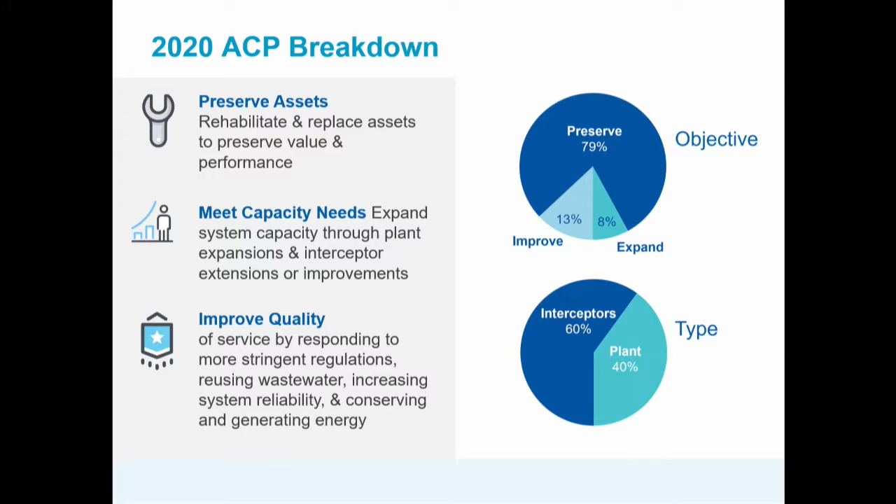So that's our solids processing facility at the Metro plant, Hastings, the plant at Hastings, Rogers, Northeast area system improvements in our Interceptor system, Northwest area system improvements, as well as renewal of 1MS100, which is the large interceptor system between Minneapolis and St. Paul that's oftentimes referred to as the Joint Interceptor. And so our completed projects that were moved out of the 6-year ACP is a deduct of $99 million. So this equates to a total 2020 authorized capital program request of about $980 million.

So in summary, the final proposed 2020 through 2025 capital program totals about $1.4 billion, of which $980 million is in the authorized capital program and $408 million is in the capital improvement program. The proposed 2020 capital budget is $158 million, all of which will be incorporated into the council's unified capital budget that you'll consider later on as part of a full council.

We have a project at the Metro plant to build a new services building and modify the existing analytical laboratory building. The project allows us to discontinue use of Metro 94 rental space and to discontinue use of on-site temporary trailers. Some of those locations are shown here.

Staff and the R&D trailers will be relocated to the analytical laboratory building. Construction field office and Metro 94 staff will be relocated to the new services building. Assembling work groups by function improves efficiency and effectiveness. The project will also include conference space in the services building to accommodate industrial and community customers.

We plan to initiate construction of this project in 2020 using design, build, delivery. This year will be before the council to approve an engineering contract for owner's agent services, and those services will assist staff with preliminary design and construction.

The Metro plant is the largest wastewater treatment plant in our system. The current capital improvement program for the Metro plant alone is a little over 30% of the total program for plants and interceptors. We have 9 plants. The Metro plant treats 70% of the total wastewater system flow, and 75% of the wastewater solids.

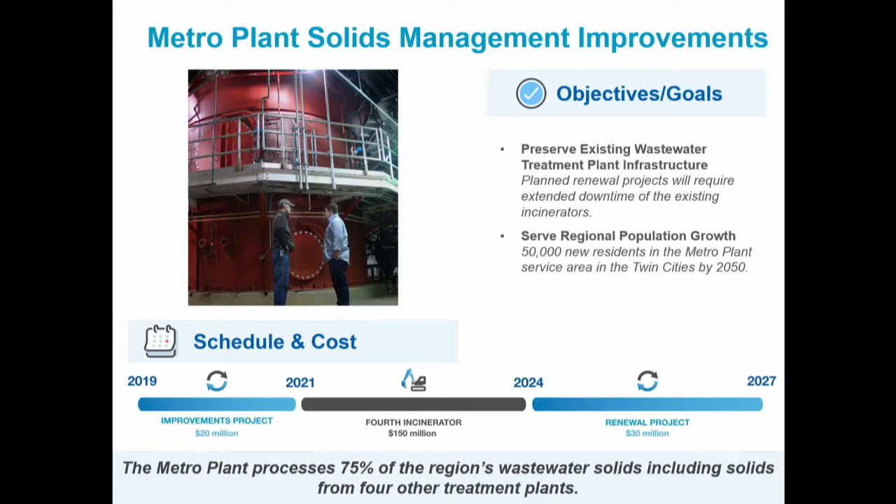We acquired the Rogers wastewater treatment facility in July. We plan to use existing capacity until a new Crow River wastewater treatment plant is constructed. When the Crow River wastewater treatment plant is brought online in 2030, it will free up interceptor capacity to serve growth in the northwest Hennepin County and the urban core.

We will have a small construction project as shown here next year to modify the Rogers facility. The improvements project will provide separate restroom facilities, office space, permanent backup power generator, security, and other miscellaneous modifications needed for operation by MCES. We will advertise a construction project for the construction contract for this project later this year or early next year. After the Crow River wastewater treatment plant is brought online, we will decommission the Rogers facility.

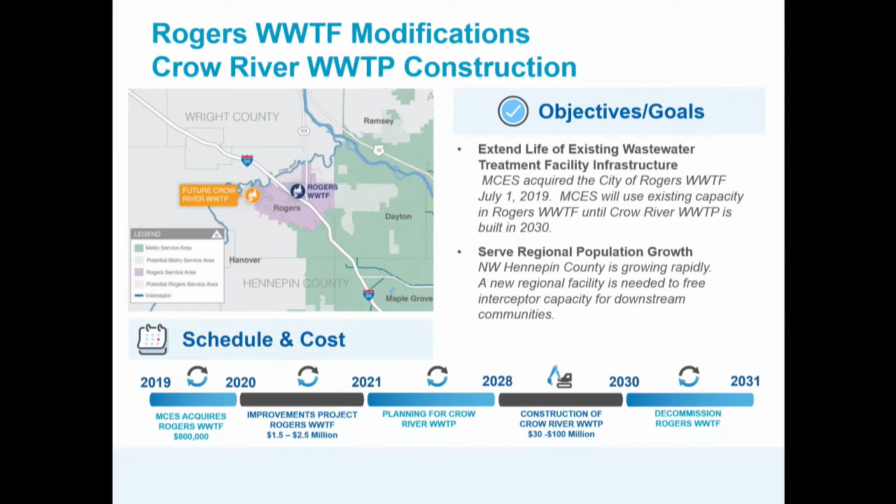This is a solids improvements project at the Empire wastewater treatment plant. This plant is located in Empire Township near Farmington. Empire has digesters that treat wastewater solids to a biosolids product suitable for land application.

Biosolids are stored on 2 asphalt pads shown here in the back of this photo. The biosolids are applied to a farm field either in the spring before sowing or in the fall after harvest. There are 2 phases currently under design.

We will open bids for phase 1 on October 3rd. Phase 1 will increase pad storage capacity by adding a cover to one of the biosolids pads and by improving pad drainage. The estimated construction cost for phase 1 is $9 million, and the bid results will be presented to the council prior to award of the construction contract later this year.

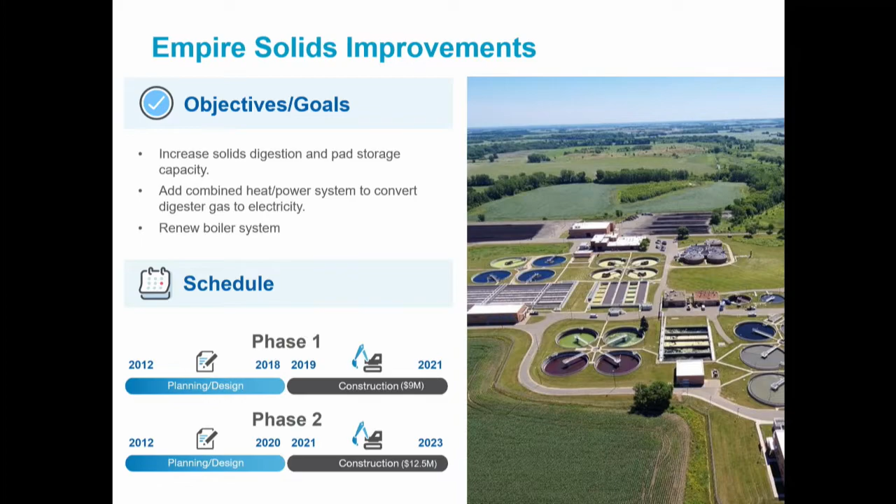Phase 2 includes digester modification and the addition of a new combined heat power engine that converts digester gas to electricity. Construction of phase 2 will begin after completion of phase 1 in 2021.

This year, we will complete some planning activities that will help us determine the schedule for building the new Hastings wastewater treatment plant. Replacement of the existing plant, located near downtown Hastings, is included in the 2040 Water Resources Policy Plan. The existing plant was originally constructed in 1952 and has undergone 2 major expansions, in 1967 and 1981. We know the plant is in need of renewal, and we will complete a total plant condition and performance assessment to determine renewal and replacement options.

And then we'll make a recommendation based on a financial analysis. The new Hastings plant site has already been acquired. It was purchased in 2005 following an extensive site selection process. The new site is 221 acres and it's located along County Road 54, about 2 miles from the existing plant.

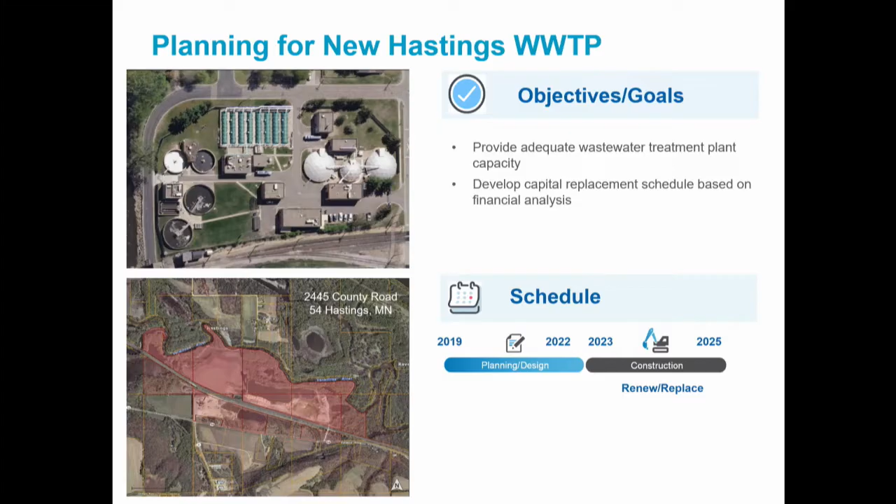Finally, another project I wanted to introduce is we are designing a wastewater reuse system for the Metro plant to take the place of some of the groundwater withdrawal. The Metro plant has 3 service water pumps. Just one is shown here, which withdraw water from the bedrock aquifer for various in-plant industrial uses. These include pump seal water, wash water, and equipment cooling water. We can reduce the groundwater withdrawal by shifting these uses to wastewater reuse.

The project will add treatment to make the wastewater suitable for limited human contact. We'll still have to withdraw some groundwater to protect plant infrastructure from uplift, but switching some of those industrial uses will help us reduce our withdrawal, we anticipate, by about half.

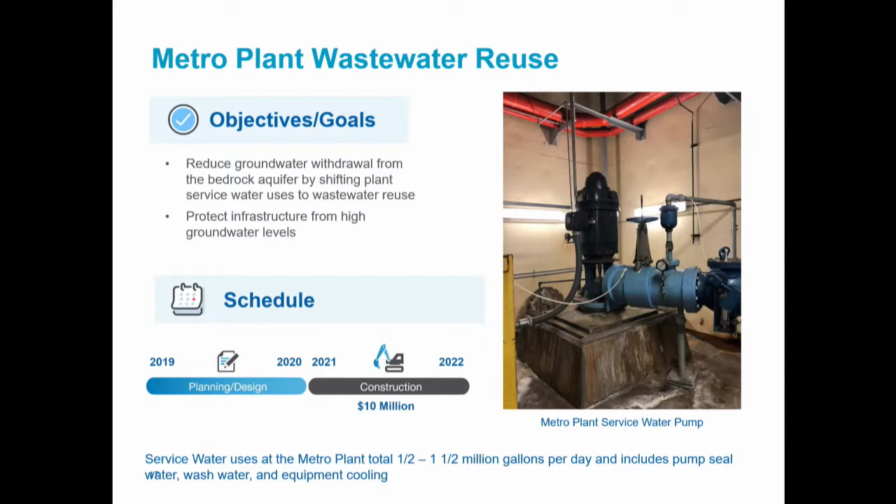Next, I'll turn it over to Adam, who will talk about the Interceptor projects.

Thank you, Renee. Members of Environmental Committee, Madam Chair, I'd like to introduce a short list of projects included in the Interceptor system that we've identified across the metropolitan area. Many of these projects reflect our continued emphasis toward asset renewal.

To list a few areas, we have identified in our 6-year capital program $124 million of projects in the Minneapolis system, $74 million in the St. Paul system, $22 million for the St. Bonifacius lift station and Forcemain rehabilitation project. Our L32 project is $25 million, and overall lift station rehabilitation improvements are $18 million. So there's a total of $518 million within our 6-year capital program.

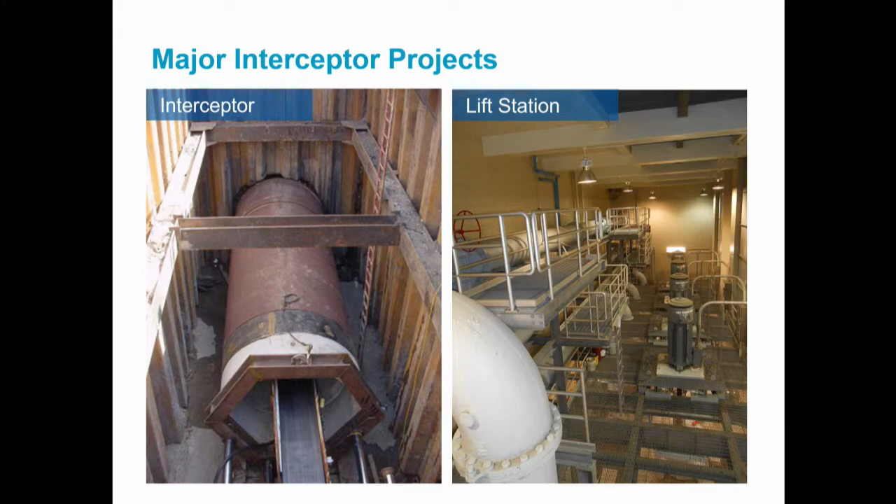A new project family has been identified in the capital improvement plan concerning the Northwest area interceptor improvements. Planning is needed to define capacity constraints and condition issues throughout this area, and determine the ultimate service area. An example is the Elm Creek Interceptor and Crow River treatment sheds. We need to screen alternatives for potential river crossings and lift station locations, and prioritize future projects and develop an implementation schedule and costs.

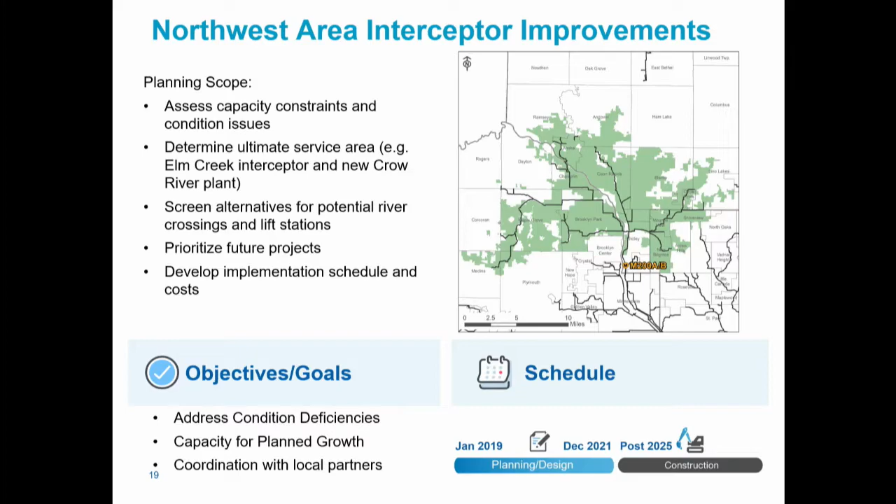Within this area, I've previously presented a business item related to the L32 lift station, which we need to reconstruct. The existing lift station is nearly 50 years old and has reached its useful life. The existing station lacks adequate storage for allowing response time during outages, and there's not enough room on the existing site to maintain existing service and construct a new lift station.

So a property was purchased by MCES several years ago on the east side of the river. The land is currently rented out to a Girl Scout camp, Camp Lockeslea, and there's been a lot of coordination between stakeholders, including the city of Fridley, Friends of the Mississippi, and the surrounding community. The ACP request for the full $25 million covers the planning, design, and construction costs for the project. Planning commenced in 2019, with a design start in 2021 and construction to follow during 2022 through 2025.

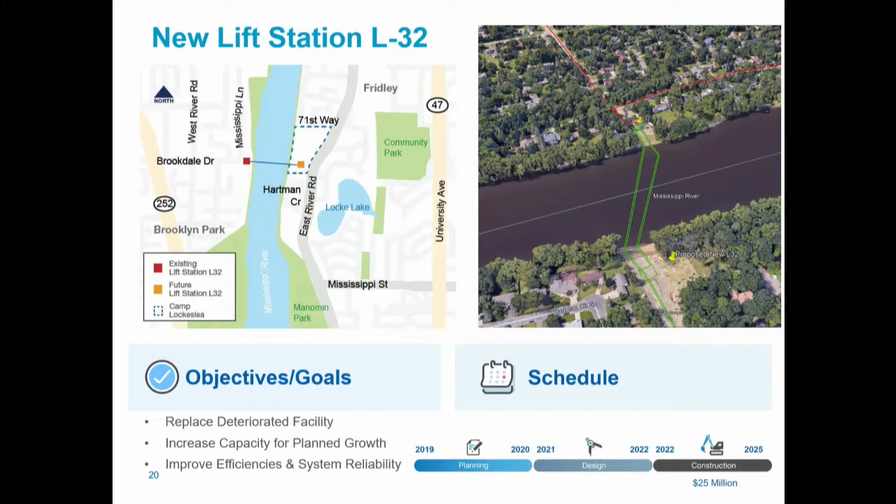We defined in the 2019 ACP a project called the Interceptor 1MN340 Rehabilitation Program, under project number 8092. The 2020 ACP proposes a new name, the Minneapolis Interceptor Improvements Phase 2, which will include planning and facility plan preparation and prioritization for several projects within the city of Minneapolis, including 1MN340.

But we have a number of needs, including several pipe-in-pipe locations. These pictures show that during the 1980s, when we had sewer separation projects in the metropolitan area, there was difficulty in placing new sanitary pipe, so the solution at that time was to place a corrugated metal pipe in the bottom of the existing storm sewers. This worked well for a while, however the CMP has corroded. We're currently fixing a lot of those pipe locations where the pipe has fallen apart through maintenance contracts, but overall there needs to be a more permanent solution.

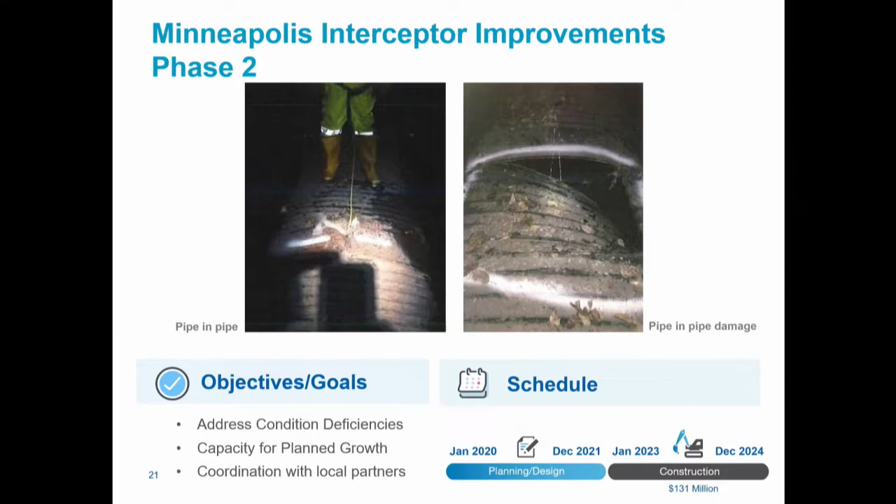The Hopkins system, East Isles Forcemain replacement, is the very last phase of a project which started well over 10 years ago with the facility planning. The 5 miles of Forcemain between the city of Hopkins and the city of Minneapolis.

The remainder is 1,900 feet of 30-inch Forcemain, and we plan on replacing that with twin 18-inch Forcemains. The area of replacement is right in East Isles, on the east side of the map, shown by the orange line work and keynote.

The area also includes a drop, which is very badly corroded, where the flow drops into an existing interceptor, 1MN330. So there's approximately $5.3 million worth of work, and we've been in preliminary design phase on that project, and we'll continue through 2019 with construction starting in 2021.

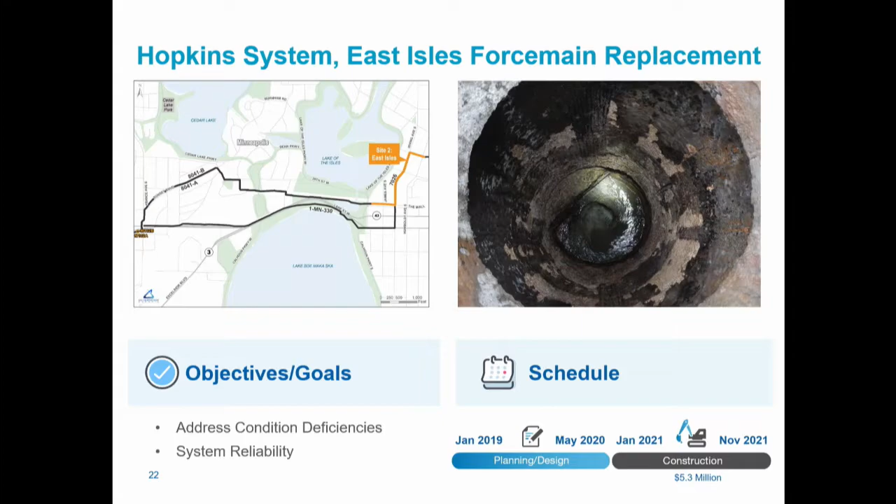The Interceptors 1SP200 and 1SP201, Battle Creek Rehabilitation. This interceptor services Woodbury, parts of Lake Elmo, and Cottage Grove. The interceptors pass through Battle Creek Park, and the project includes about 5,000 feet of lining of 30 and 33-inch concrete pipe that was constructed in 1959.

This also includes improvements to the Battle Creek Siphon Head House, located right in Battle Creek Park, with a mechanical grinder and structural improvements. As you can see in the pictures, this is one of the better sets of pictures I've seen of badly corroded pipe. We have condition 5 pipe, so this project is needed to prevent a future problem.

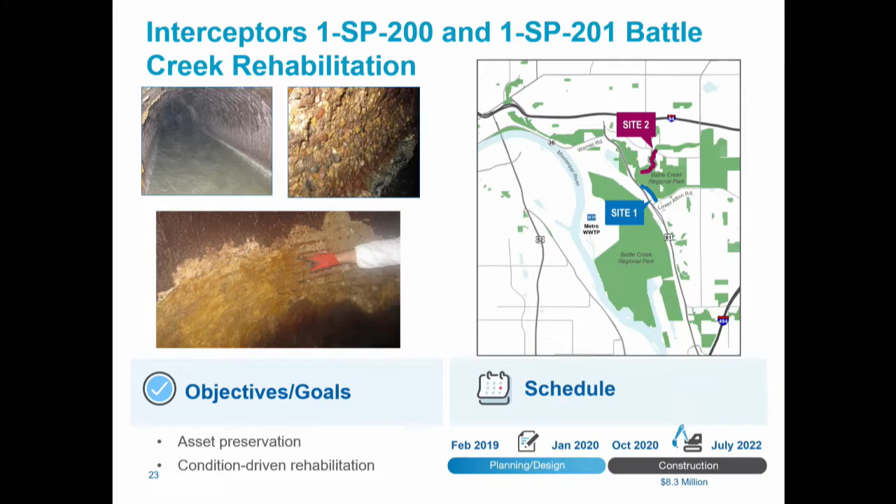The L24 lift station and Forcemain replacement project. I was in previously for a business item for land acquisition needs for this project, the same as part of the St. Bonifacius system. This project includes approximately 3 miles of new Forcemain and rehabilitation of the existing L24 lift station due to the age of the system and also capacity constraints due to growth.

We're looking at construction to begin in 2020, and it's approximately $25 million worth of work. Just to note, this project had a portion of the Forcemain previously replaced under a different project underneath Lotus Drive.

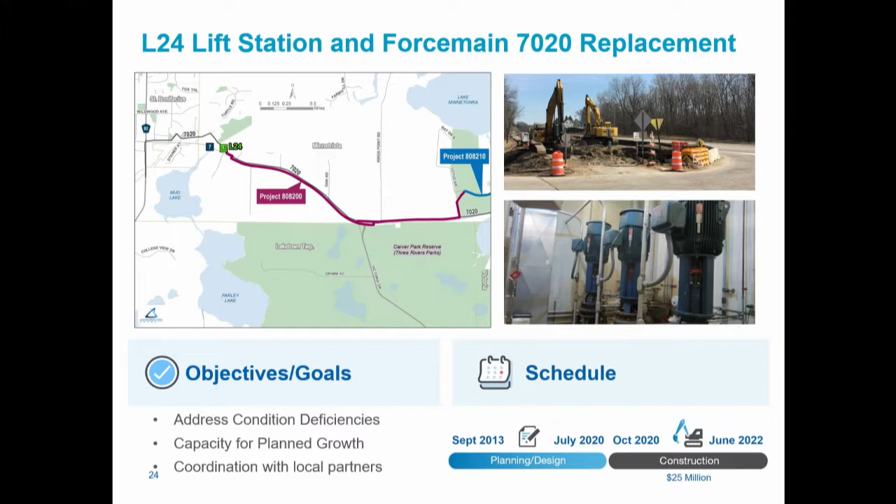Madam Chair, members of the council, before you is the schedule. On August 8th, the divisions had a division level budget presentation. On August 22nd, there was an adoption of the preliminary unified operating budget and levies. And tonight, we're presenting the MCES capital program and budget.

On October 9th, there will be a division level capital program presentation, followed by an adoption of public comments on the draft budgets on October 24th, with anticipation that on December 11th, the entire council would adopt the final 2020 budget and levies. So this is just a piece of the process.

This presentation is more in depth on environmental service issues than what you'll see as you move through the process. That is why we wanted to provide you with some examples of some of the programs and projects we're planning to undertake. So there is no action before the council this evening other than to respond to questions.

Thank you. Are there questions? Anybody have a question? We have to ask a question?

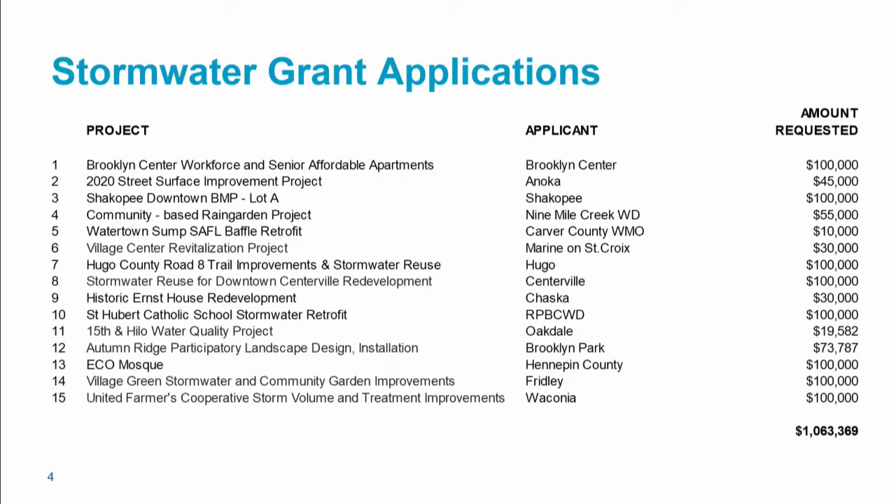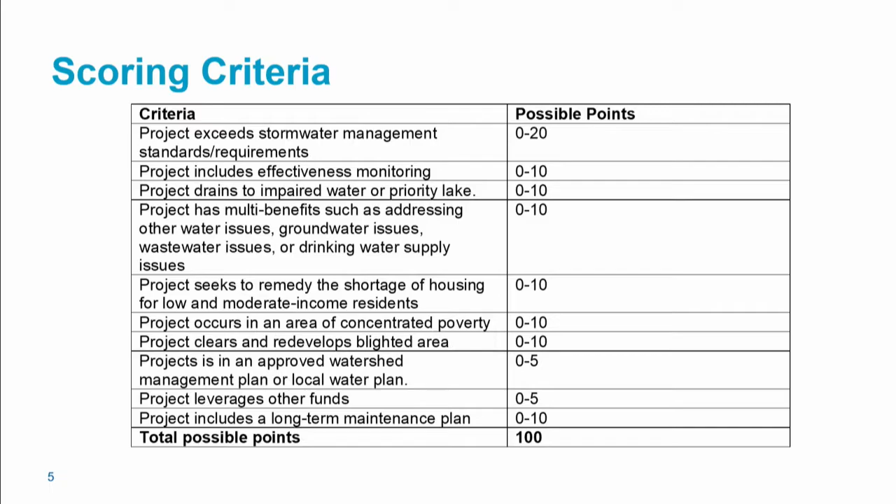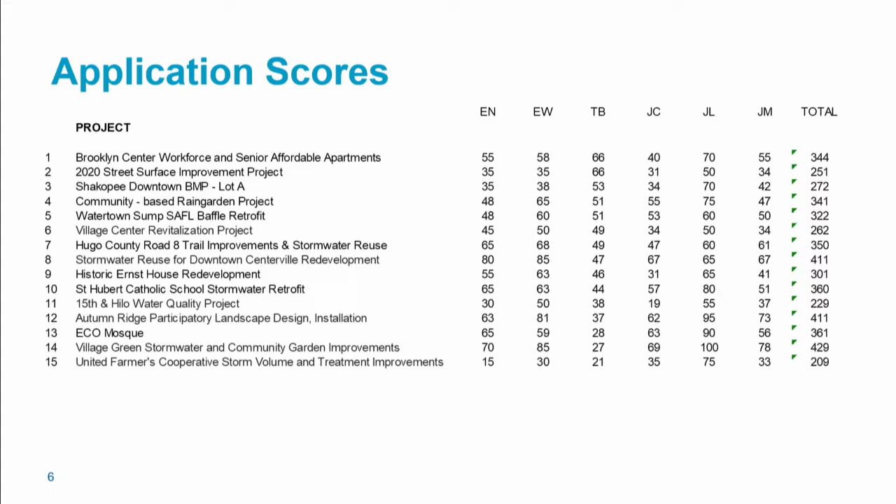Here are the final scores for each of the applications in the order they were received. The next slide shows the applications sorted by total points, highest to lowest. All of these projects were good projects. Some just scored higher than others based on the criteria.

Again, we got a request for about twice as much money as we had available. So here are the recommendations we've settled on. The top 3 projects were pretty much unanimously scored as the highest ranking projects by all the reviewers. The next 2, the 4th and 5th project, there's really only 1 point difference between the scores for those projects. After that, it drops by about 10 points, and after that, it drops by another 6 points.

In order to spread the funds around a little more, we recommended partial funding for those applications below the top 3. We recommended more for the 4th and 5th because they were only 1 point apart—$75,000 for each. They each requested $100,000, the maximum amount. The 6th project, we recommended $50,000 for because it was 10 points lower than the next closest one. And the final 7th project, we recommended $25,000 for.

I have to stop you for a second — looking at your nice picture, except that when our wastewater treatment plants discharge into rivers, they don't send brown stuff. I have an aerial photo, Madam Vice Chair, of our wastewater treatment plant discharging into a river — it's lovely clear water discharging into murky brown water. That's a great observation, thank you. A map from Iowa.

I'm going to talk about the history and purpose of our stream monitoring program — a few historical highlights, and then walk through the program element by element to explain how they work together to describe stream water quality.

The purpose of our monitoring program is to support regulatory strategies by quantifying regional non-point source pollution, to measure regional stream health, to provide actionable information to our partners for local water management, and to partner with local public sector water resource practitioners to monitor and assess regionally significant streams.

In 1989, Governor Rudy Perpich set a goal of a 40% phosphorus pollution reduction in the Minnesota River Basin. In response, Environmental Services developed a network of non-point source pollution monitoring stations in the lower Minnesota River. The data from this program was eventually used to inform major wastewater treatment upgrades at the Metro Plant in the mid-90s.

Between 1996 and 1999, Environmental Services was directed to develop target pollutant loads for the streams in the Twin Cities. As part of that effort, the stream monitoring program was expanded to 21 monitoring stations throughout the metro area. The original monitoring program was entirely within the Minnesota River Basin, now our monitoring is region-wide, including stations developed with local partners. Now in 2019, we are celebrating 30 years of this monitoring program.

Here are some pictures of our hydrology monitoring. This larger picture is Credit River near Savage, Minnesota. All of our streams are wadable at some point during the year, not necessarily all the time. When doing a wading measurement, you can see the handheld device we use, just to answer how much water is flowing past us right now. This lower picture is the Vermilion River in Hastings, which tends to have higher flow and isn't safe for wading, so we use this super cool boat to answer the same question: how much water is flowing here?

At all of these locations, we also have automated equipment collecting information for us. We make these measurements on a periodic schedule—our automated equipment takes a measurement every 15 minutes, telling us how much water is flowing past the stream. This data is uploaded hourly to our EIMS website and is publicly available.

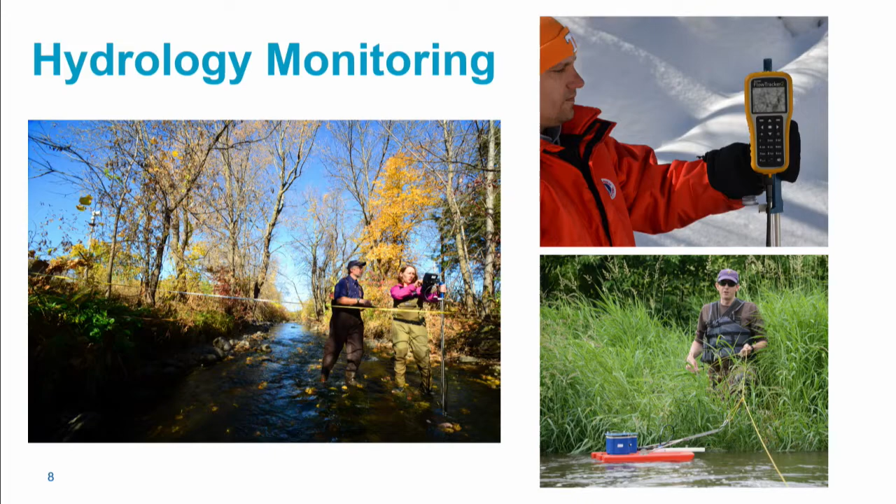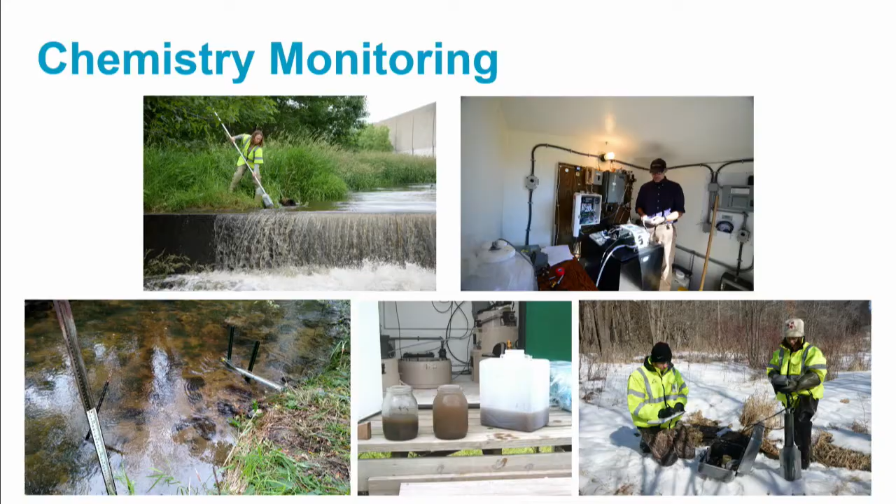Then the third element that I want to talk about is ecology monitoring. For all of our streams, we sample macroinvertebrates and we do a habitat assessment. The reason that we sample macroinvertebrates, which are the kind of bugs that live in the water, is that they are living there for either their whole life, or some of them, for example a dragonfly, are aquatic as a larva but then emerge as an adult terrestrial bug. No matter what, the length of time that these bugs are exposed to the stream conditions informs us a lot about the water quality over time.

For example, when we collect any one of those bottles of water that you saw in the pictures, that only tells us what the water was like at the moment that we collected that bottle. Bugs have a known ability to tolerate pollution, so when you collect an entire community of organisms and identify them, you can know if you have a community that's primarily clean water bugs, that's really good evidence this is a clean stream. Conversely, if you've got a community that's mostly known to be very tolerant of pollution, that's good evidence this is a pretty stressed out system.

Macroinvertebrate monitoring is really important because it gives us very concrete information on the health of the stream. It's also really important because it's very engaging. We had some live bugs at our Battle Creek tour in July, and I bring live bugs with me whenever I can. It wasn't super appropriate for the council chambers, but they tend to really draw people in, kids or adults, and it's a great way to introduce the topic of water quality or water resources. Even when people think they're creepy, they still want to get a good look.

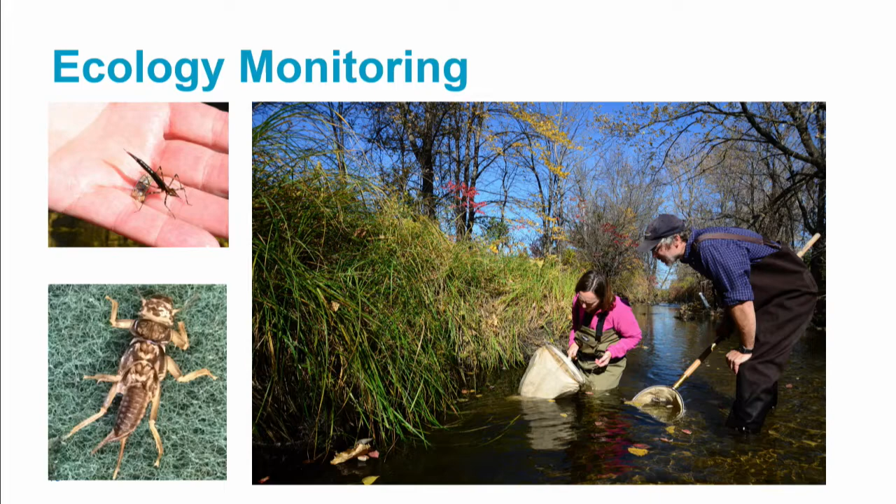And we said, okay, when the grown-ups are gone, bring your kids on over and we'll talk them through what we've got. So we had a whole classroom full of really fascinated preschoolers come and look at our macroinvertebrate samples. I think it's a way to make stream monitoring a lot more practical and engaging when you're trying to talk to a more general audience.

So I hope I've given you a good overview of our stream monitoring program. I'd be happy to take any questions that you have. I have a question before I'm going to offer it up to you guys.

So you said that the whole stream monitoring thing started in 1988 because Governor Carlson wanted to reduce phosphorus in the Minnesota River. What is the phosphorus now compared to what it was in 1988?

Okay. Questions? Councilmember Allstern?

It's hard to make a really specific statement like that with this general trend overview, but we do have a really nice fact sheet and chapter reports on our EIMS website. So if you are curious to know more specific details about the Carver Creek watershed over the trend analysis period, I think I'll just refer you to that instead of trying to come up with something off the top of my head. Okay, but I'll look at that then.

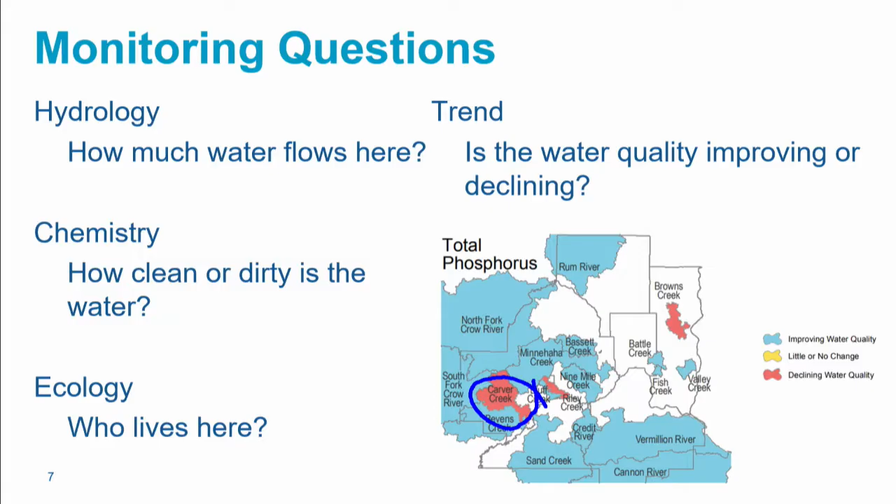All right, then just getting back to the point source comment. So in the example, you showed something like an animal feedlot as not being a point source. I'm just wondering, it seemed like it'd be pretty definite that was a point source. In this case, when I'm talking about point sources, I'm talking about point sources that are regulated. Agriculture tends to not be.